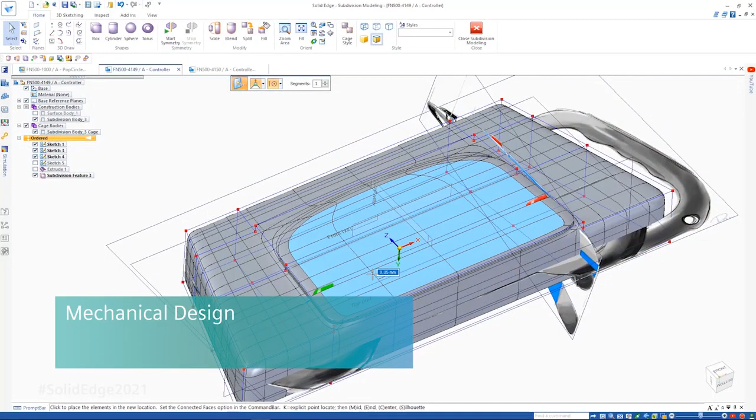Mechanical design. Design at the speed of creative thought with new subdivision modeling, lightning-fast reverse engineering, a new user interface that's powered by artificial intelligence and an intelligent 3D model search engine.

Electrical design. Enable fast, accurate 2D layout of industrial control panels with new cabinet design capabilities.

Simulation. Optimize and validate designs with tighter integration between flow and structural simulation.

Manufacturing. Speed up NC programming with a searchable post-processor database, new fast roughing, and adaptive milling.

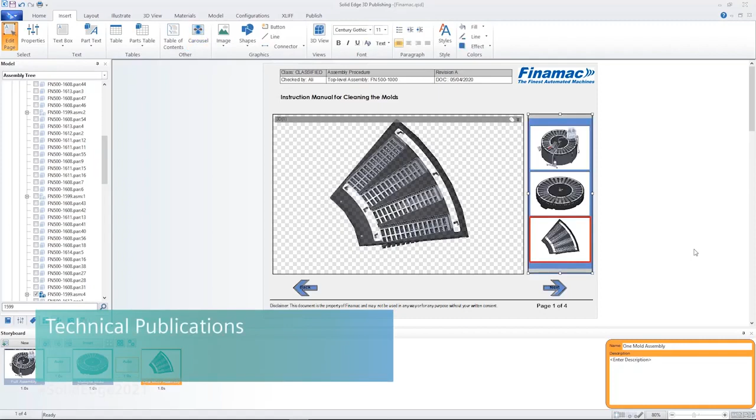Technical publications. Produce high-quality documents and illustrations faster and directly from your 3D models.

Data management. Take control of your data, saving time and money with rapid concept modeling and shape search capabilities.

Cloud-based collaboration. Harness the cloud to edit and share CAD files and much more. And there's so much more. Our beta customers are calling this the best Solid Edge release in years. We can't wait to share all of the details with you, so get ready to experience Solid Edge 2021.

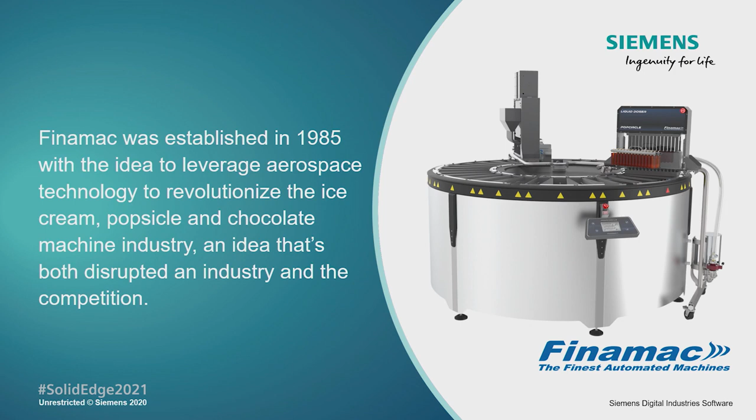I'm going to be using a data set here to talk through a popsicle making machine. And the really interesting part about this, I want to thank our partner Finamac. Finamac's a company that had a great idea. They said, how can we take aerospace technology and apply it to machines like ice cream, popsicle, chocolate making. And they've really transformed their business, full digital transformation.

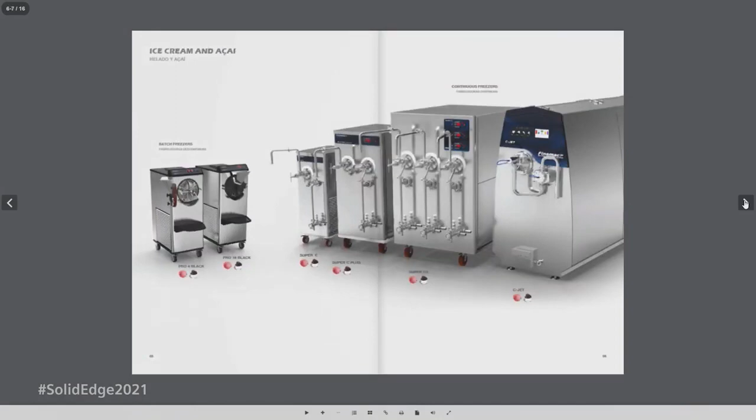If we take a look through their catalog, we can see all sorts of things: ice cream making machines, popsicle making machines, chocolate, display cases, ice pop machines, mixture prep, all beautiful designs. The most amazing thing about this to me, however, is that none of this is real, what you're seeing. This is all digital twins. Every picture you see here is straight from Solid Edge, rendered, and into their catalog. So you're really seeing the full realization of the digital twin here with Finamac.

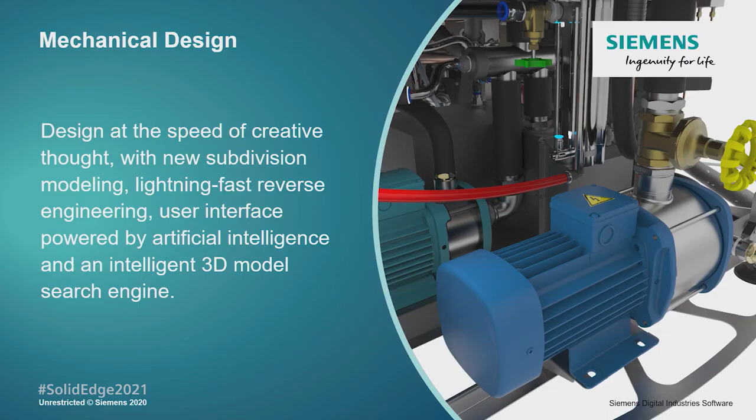So let's start with mechanical design, the core of what you do. New subdivision modeling techniques, very fast reverse engineering, and some new artificial intelligence capability I think you'll really like. Also an intelligent 3D model search engine. Quite a lot to see here just in this first section.

So let's go through them one by one: subdivision modeling, reverse engineering, adaptive UI, core CAD, the stuff you do daily, and supplier catalog integration. And these are just a few of the things that we're highlighting today. There's a ton of new stuff in Solid Edge 2021 that I think you'll really enjoy and will be really productive for your company.

And let's start with subdivision modeling. This is amazing technology that allows anyone to create beautiful shapes. In the past, this was really the domain of a specialist—NURBS and surfacing and all these complicated things. Now anyone can create beautiful shapes.

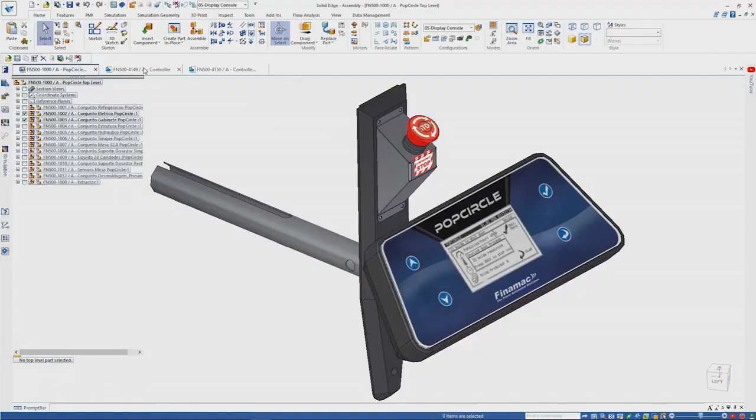Let's take a look at that with Oliver. Yeah, thanks Dan. So let's jump into the Finamac machine and we'll take a look at subdivision modeling. Here what we're going to do is design the portable controller. And as Dan said, subdivision modeling is all about enabling you to develop distinctive organic shaped products, but without the need for expert knowledge. So if you're not the best at surface modeling, for example, here's your chance to shine.

We'll start here with industrial design sketches as a guide, and really subdivision modeling can be simplified to 3 steps: the initial shape, a control cage to push and pull, and then blend options. We started here with a box shape and pushed out the lower portion using the control cage. A split operation can be used to subdivide the control cage, which in turn gives more control over the shape of the body. And the control cage can then be adjusted.

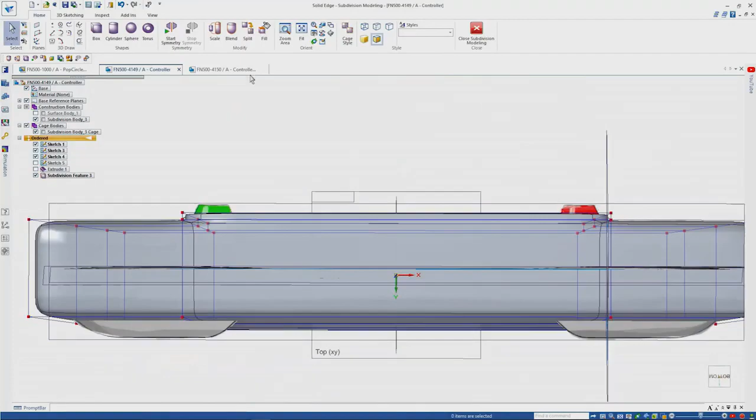Here we can accommodate room for the central area where we need the controller screen. A simple split operation adds the necessary faces to the model. And then importantly, this blend function can be used to control how sharp or smooth certain edges are. And while many expect to see only smooth blend options, that's not the case in Solid Edge.

Here you can choose sharp blends wherever you like. Then to create the cutout for the screen, a series of similar push and pull techniques can be used to easily get the desired result.

Now, many parts are designed symmetrically, especially in the consumer space. To achieve this, we can simply define the symmetry plane, then any edits made on one side of the cage are reflected on the opposite side, as you can see here.

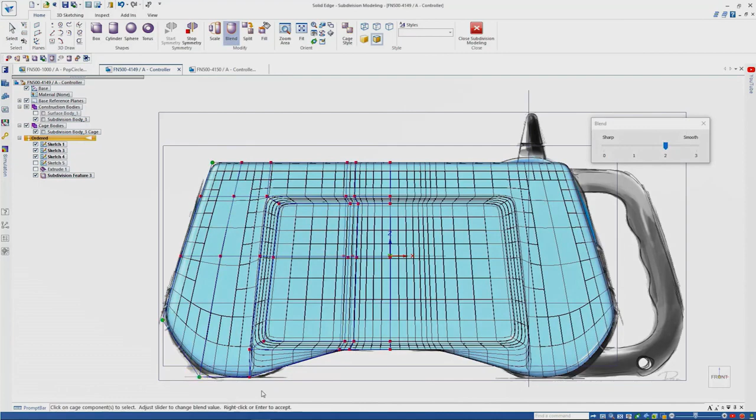And those of you who use synchronous technology in Solid Edge will be familiar with the steering wheel, and it's equally at home here to manipulate this organic shape. For the notch at the top of the part, a simple move face operation creates the geometry that we need here. And to help keep track of what edges we've blended, the value of each of those blends can be shown at any time for every edge and vertex, as shown here.

Now we need to create the handle on the right-hand side of the Finamac controller. I'm not going to cheat here by pulling out something pre-created. We're going to do this live just to see how easy yet powerful this technology is.

Same as before, grab an initial shape. Here we'll extend its form and then use the control cage to push and pull into shape, followed by some blend control, of course, for the finger grips.

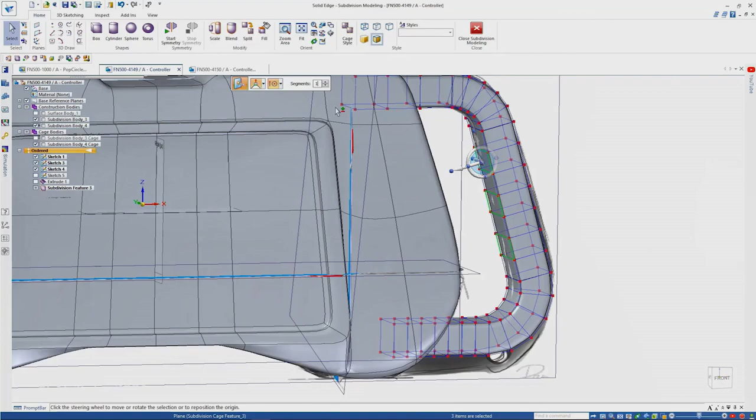Nice and easy. Done. Importantly, traditional solid and surface modeling techniques can be integrated with subdivision modeling. Here we can use an existing surface to split the subdivision geometry and then thicken the result to create the raised portion of the handle.

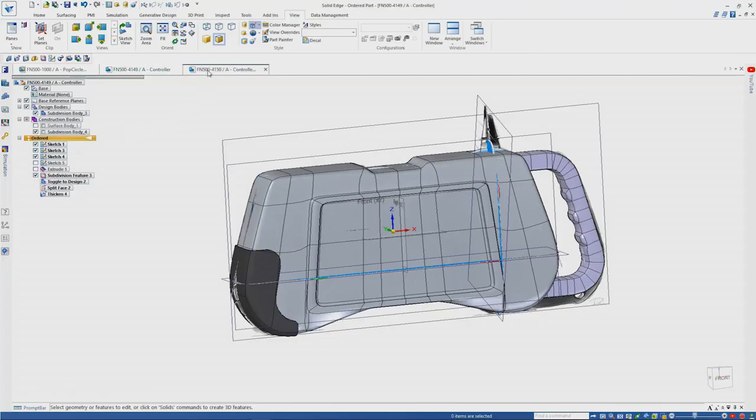And of course you can go on to add further details using more traditional modeling methods. But just look how easy that was. Something that would have taken traditionally hours, if not days. But here in Solid Edge 2021, we're talking minutes.

Back to you, Dan. Yeah, thanks, Ollie. I tell you, I've been around the industry a long time, and I've seen what it takes to do that kind of modeling, literally days to do a type of model like that. And to see that done so quickly live in front of us, it's really, truly amazing, even to an industry veteran like me.

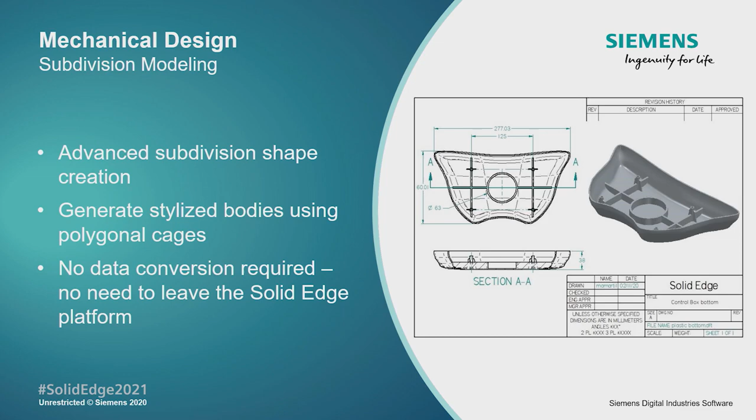So what you see is it's really easy to create those shapes, using the polygonal cage. It takes a little bit to get the hang of it, but once you do, it goes really fast. The great thing is it's right in Solid Edge, built in, no specialized tools or other products to buy. Available to you in Solid Edge 2021.

We're seeing great feedback from customers around this. For example, Jason English at Ditch Witch. Ditch Witch makes earth moving and ditch digging equipment, but they're bringing more and more stylized shapes. They want to see what their industrial designers can do with a new technology like this. I'm excited to see as well.

Next up is reverse engineering. We introduced reverse engineering a couple years ago, and we've been continuing to invest in it, making it faster, adding new features. I think you'll be really pleased with what we have in Solid Edge 2021. Let's take a look.

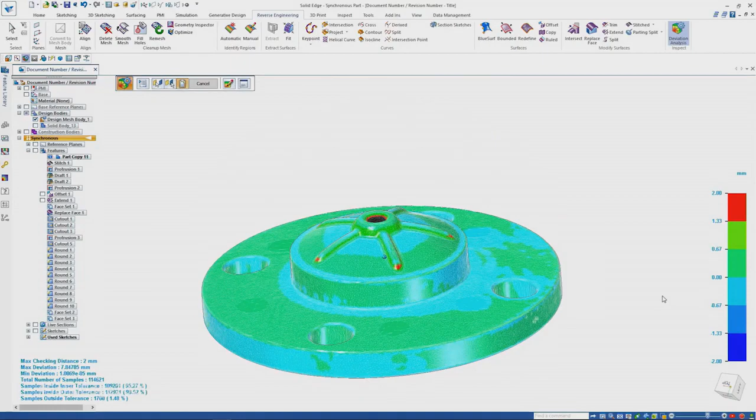Thanks Dan. So we'll jump back into Solid Edge 2021 and take a look at one of the recent additions to Solid Edge's reverse engineering toolset, deviation analysis. This allows you to measure the accuracy between an original scan and the resulting reverse engineered model, or even compare scans. The result plot color codes deviation for easy interpretation.

Red means our test body exceeds the reference body, and dark blue depicts negative distances. On-screen callouts identify minimum and maximum deviation, and you can copy and paste any of the data for later reporting. Settings such as deviation range and result decimal places can be adjusted at any time, taking just seconds for the model to recompute. Back to you, Dan.

Thanks Ollie. Some great new capability there in reverse engineering. Of course, the deviation analysis - those models that you're taking from the real world and creating a physical digital twin, how far do they deviate from the real world product? Easy to tell with deviation analysis. And importantly, it's really fast now, so things that used to take minutes now take seconds.

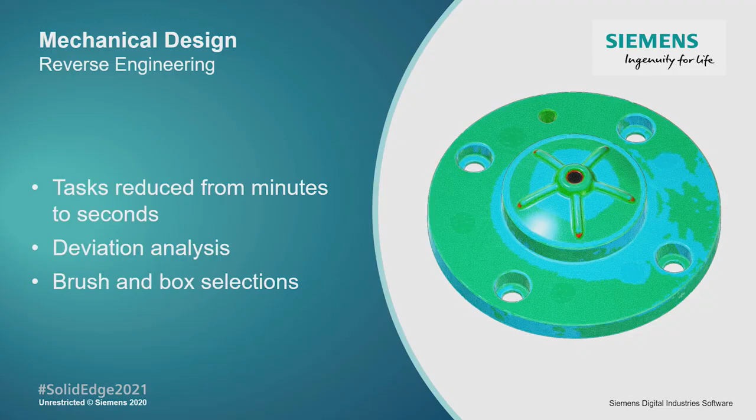Next up is Adaptive UI. This is a great new technology I'm really excited to bring to you guys. It uses artificial intelligence to predict what you'll do next. How does it do that? Well, it looks at what you've been doing in the past, looks at your patterns, and then figures out what you might do next and presents those options to you. It's really groundbreaking stuff, so let's take a look.

Very cool indeed. So let's jump into Solid Edge once more. What you need to do here is keep your eyes on the top left of the screen. Solid Edge 2021 includes an artificial intelligence-based assistant in the user interface up here to predict the next commands you need based on what it is you're doing and where you are in a design.

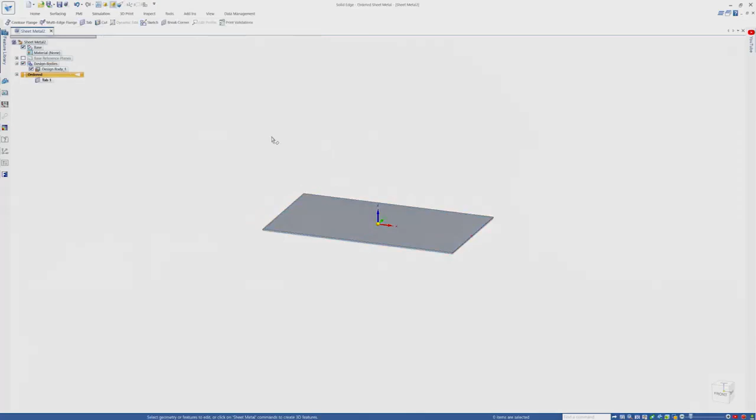So for the Finamac machine, there's lots of sheet metal work, and Solid Edge 2021 has learnt that from the design engineer. Rather than presenting tools that are commonly used across the industry, which would be good, it's presenting tools commonly used to the individual, which is excellent.

That's right, Solid Edge 2021 is now individually tailored to you, and what's more, it will continue to learn from you and dynamically improve how it holds your hand through your day-to-day work. It's really interesting to watch, dynamically presenting the next selection of tools, even across environments, as we go from sheet metal to sketch and back, presenting those specific commands.

And I said at the start to keep your eyes at the top left of the screen. Notice that it's just one toolbar. This means you can remove the other toolbars to maximize your workspace. You have what you need right here, ready when you are. Back to you, Dan. All right, thanks, Ollie. That was great.

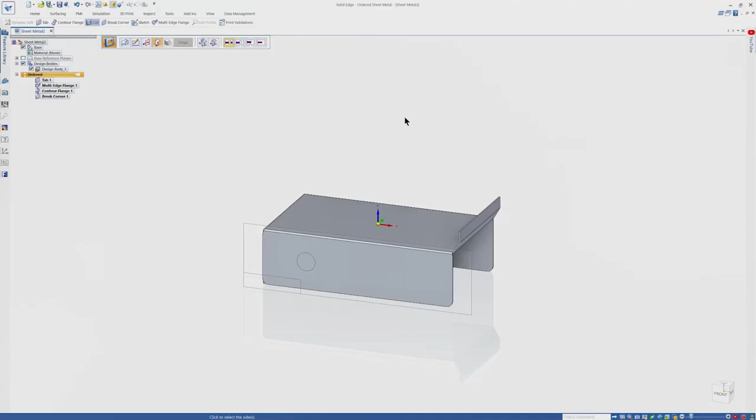As you saw, we're harnessing the power of artificial intelligence, and you see how it can really be applied to your daily work. So it's personalized to you, it actually learns from you. What it does after the first day of usage versus what it does after a week of usage will be a little different because it's learned from you. It's a little bit smarter.

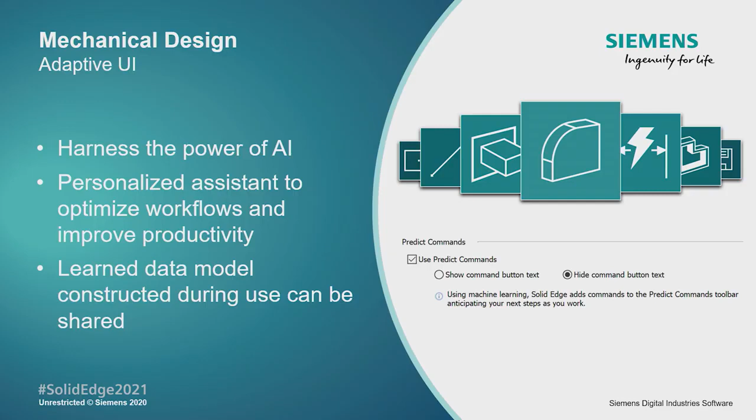And the great thing about it is, though, you can also share that with others in your company. So even though your work isn't the same as other companies, within your work you may have similar things that people do. You can give them a head start on learning by sharing your piece with them.

In the area of core CAD enhancements, we've had a lot of work going on. As I said earlier, there's no way we can cover the depth and breadth of Solid Edge 2021 in this short update. But I want to show you a few things that I think will be really valuable in day-to-day work, the stuff you do every day.

Great, thanks Dan. So yeah, let's jump back into Solid Edge one more time. And here is the Finamac Popsicle machine. Oh, by the way, the actual name of this machine is PopCircle. PopCircle for popsicles, I like it.

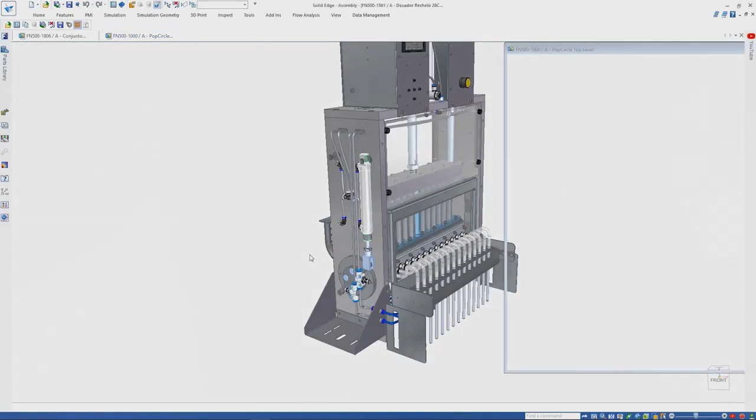First off, we're using large assembly mode here to make the most of our computer's resources and keep things performing as we expect. You can see that top left. And there's more to help with performance here also. It's common practice for suppliers to provide a 3D file of purchased items, such as the piston assembly that you can see, and using the new internal components option on import, all separate parts are contained within one single assembly file, with no parts written to disk. This enables faster import times, especially on larger data sets.

And even though these parts are all internal, we can still carry out many traditional operations, such as taking measurements, analysing mechanisms. Here we can see the correct operation of the piston assembly with its internal components. Furthermore, you can then assemble the item in a way it would work if it were a regular assembly. All in all, this provides increased performance and lower consumption of system memory.

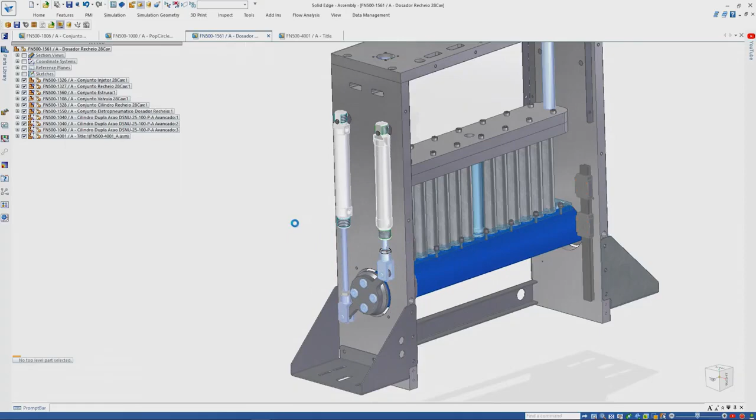Next up, reusing designs is now even easier. When copying and pasting multiple parts and assemblies between designs, existing relationships are automatically captured and reused in the target assembly. A step-by-step process guides you through the operations to add the external relationships required to fully position the parts. All internal relationships come along for the ride. This significantly reduces the time for these common operations.

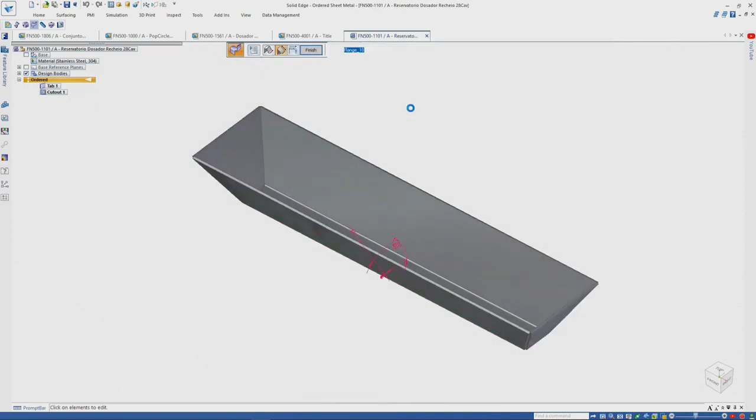Next up, let's step into sheet metal, where we've got new multi-edge flange command that speeds the process for designing sheet metal parts. Multiple edges can be selected at the same time, angles can be defined, and miters automatically added. It's as simple as picking the edges and then pushing or pulling. In addition, partial or centered flanges can be defined, and trim options make light work of tasks that would normally require multiple operations, even with offset or gap distances as required. These sheet metal enhancements, along with many others, increase productivity and efficiency by being able to design parts faster and easier.

Next up, and also new in Solid Edge 2021, is a new Decal Command. This makes it quick and easy to add labels and images to parts. You simply select the desired image, define the desired size, and then position it accurately using regular sketch relationships and dimensions. The decal can span multiple faces, as we see here. However, changing the position of it is as simple as modifying the dimensions or relationships that are assigned.

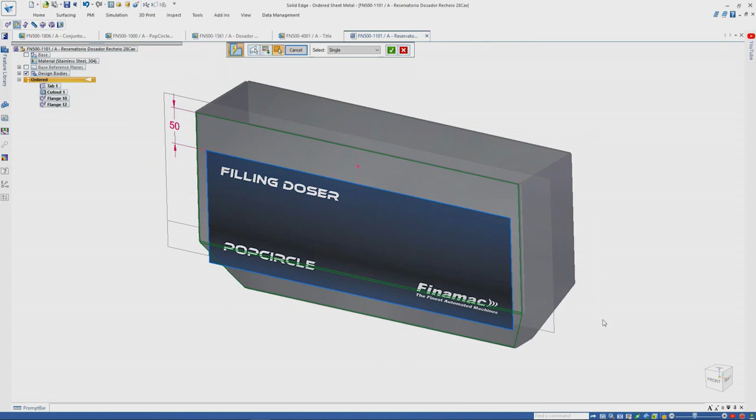Solid Edge 2021 also sees enhancements in frame design. We'll move to that next.

Here, what we're going to do is place a cross frame which has coping applied so that it matches the circular cross-section of the vertical frame. Now we can specify a weld gap between two frames, and this is especially important in generating an accurate cut length of welded frames in our parts list.

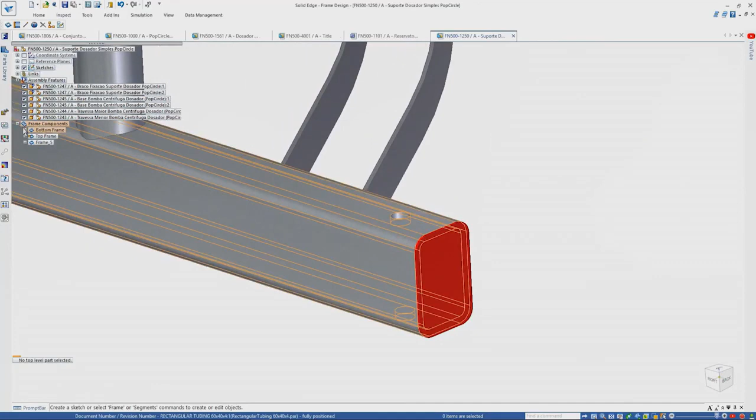Also new in Solid Edge 2021 is the end caps command, which allows quick definition of these types of parts within a frame. This single command provides a wide range of options. Simply select the frame cross-section, choose the material and specify the type. You can choose from different types like inward or outward, and even define offsets or have chamfered corners. The end caps are then reflected in the bill of materials, eliminating additional work for the user.

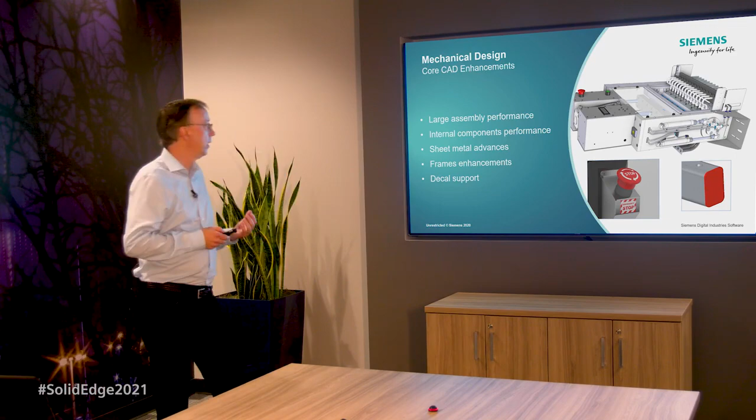Today it's used for importing parts, as Ollie was talking about, the ability to import an engine that has 300 parts and just jam it all into one assembly without worrying about all those individual part files, because honestly you really don't care about them. Perhaps they come from a supplier. But that internal components technology will also let us leverage it in the future and do more exciting things in coming releases.

The sheet metal advances are really amazing. I know a lot of you are Solid Edge customers because of sheet metal. We're the sheet metal guys and continue to be so. The new multi-flange with the ability to auto-trim against each other is unique in the industry, and it's actually patent pending right now.

Frames, we continue to build that out. A lot of machinery design customers build frames, end caps, and the weld gaps provide great capability there. And decals, as you saw, it's not just decals on a flat surface, it's curved surfaces, across multiple surfaces. Really, really nice implementation.

We see our customers really enjoying the Solid Edge 2021 release. For example, Luca Carminati at CMS has been working with the new sheet metal. They do a lot of sheet metal at CMS, and this multi-flange and auto-trimming is going to save them a bunch of time.

And what about supplier catalogs? You're often getting different parts and catalog data from your suppliers. Different people make different products that you incorporate into your product. What if it was easy to find, with a bunch of different ways to find it and be able to utilize it in your design? It's going to save you a whole bunch of time.

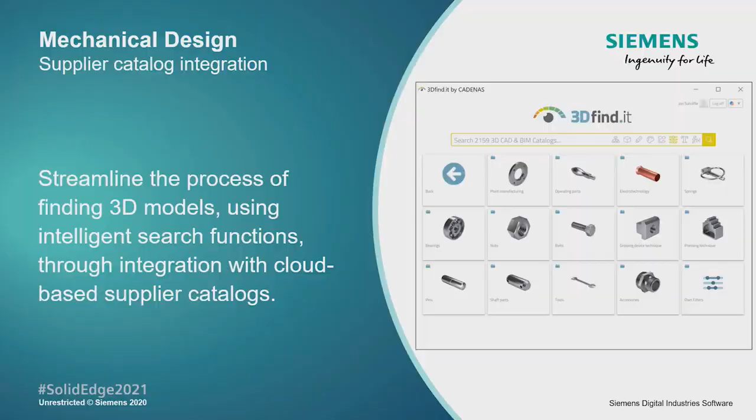Let's take a look. This is 3D Find It for Solid Edge, powered by Cadenas, the latest search engine for mechanical, electrical, and electronic engineering. Here we are searching for a cable gland using text, narrowing down the search by filtering supplier, and we can even add additional search items, in this case to filter for ISO standard.

You can even search using 3D geometry, sketches, and much more. We can visualize the 3D model for the part, or even its 2D drawing, select the relevant individual parameters as you saw earlier, and then a single click brings it right into Solid Edge, ready to go. Back to you, Dan.

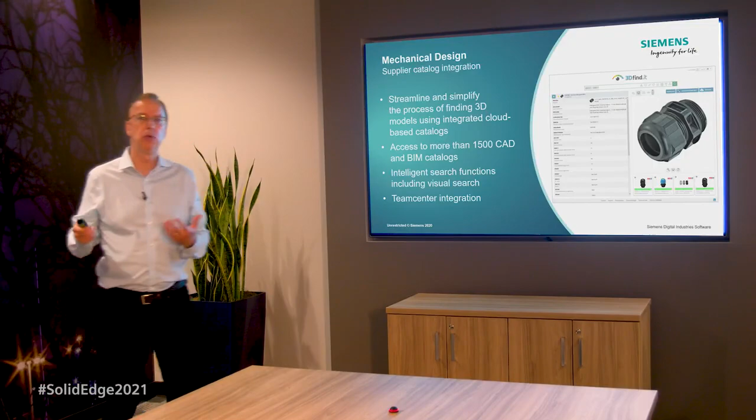Thanks. So as you see, you can really save a lot of time, just reusing things that already exist, but the problem is usually finding them. Being able to go to a supplier catalog, find the suppliers you're used to working with, and get the products directly from them. Access to more than 1,500 CAD and BIM catalogs, and lots of interesting ways to search, fully integrated with Teamcenter as well.

The folks at Ditch Witch are very excited about this. The catalog integration allows them to save a lot of time, not having to build parts or rework parts, but simply use what already exists.

All right, so a lot of stuff there in mechanical design, more than we could possibly cover here. I invite you to look into it more deeply. But not just mechanical design. We were talking earlier about digital twin. I think you really need to take a look at your business and think not only how can I be productive with mechanical, but can I expand? Can I go further in my production process perhaps? Or can I go sideways into electrical? What ways can I become more productive as a company by using the tools to enable your digital transformation?

So there's a lot to talk about in electrical, and first is wiring design. There's a really important thing coming here in Solid Edge 2021, and that's cabinet and panel design. It's a whole different thing when you're wiring a tractor or a car than it is when you're creating industrial control panels and cabinets that go into the machines that you design. Full complement of tools there now. Okay, let's take a look.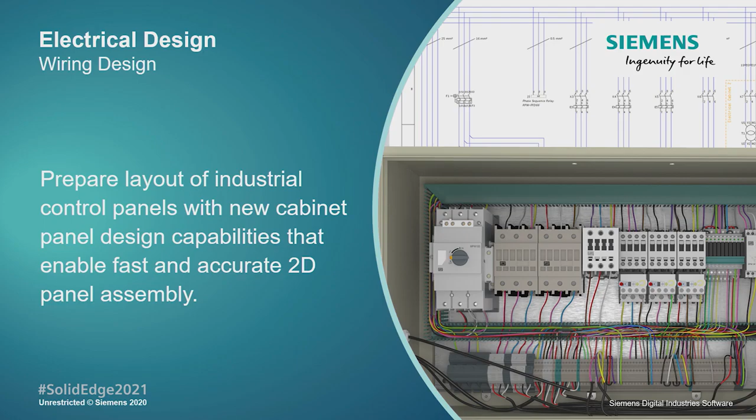So here we are in Solid Edge wiring and harness design. We're going to add to the existing electrical design work for the Finamac machine by laying out the machine's control panel. Solid Edge 2021 has new cabinet panel capabilities that allow us to reuse the schematic intelligence that you know of Solid Edge to generate the panel layout.

Placing the correctly sized cabinet based on our specs, we can add additional items such as backplates, channels, mounts and other hardware. We also need some wiring ducts, so here we'll place a series of channels. Dynamic dimensions provide accurate feedback, and industry standard profiles are available.

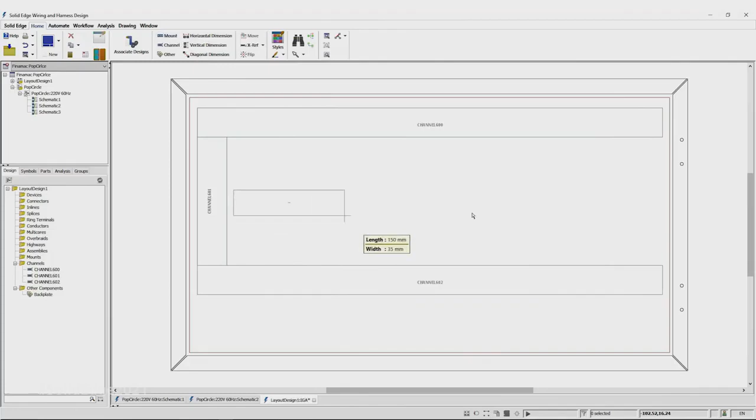Using the mount command, we can add the necessary DIN rails to which we'll attach electrical components. Again, accessing the properties allows us to choose from industry standard sizes and profiles. Adding some dimensions to the mounting plate, as well as the channels and rails, will help document their positions.

Associating the new layout design to the schematic allows us to place the relevant logical electrical components. Placing devices is simple, and there are many ways in which this can be achieved. We can place single objects or multiple objects at the same time. Shortcut options allow control over snap points, rotation angle, the order of placement, and much more, all of which are dynamically previewed during this placement process.

The last few devices are being placed onto the top and bottom rails. Nice and quick and easy. And of course, what's going on in the background and what's automatically being updated is a bill of materials as we've been adding these devices to the layout design. And the bill of material IDs can then be easily generated with balloons.

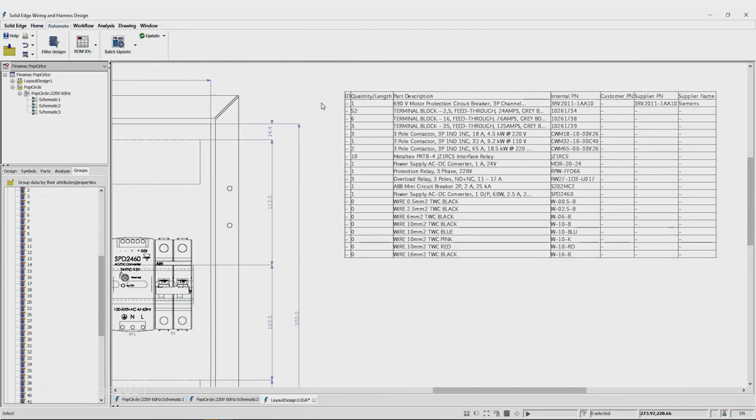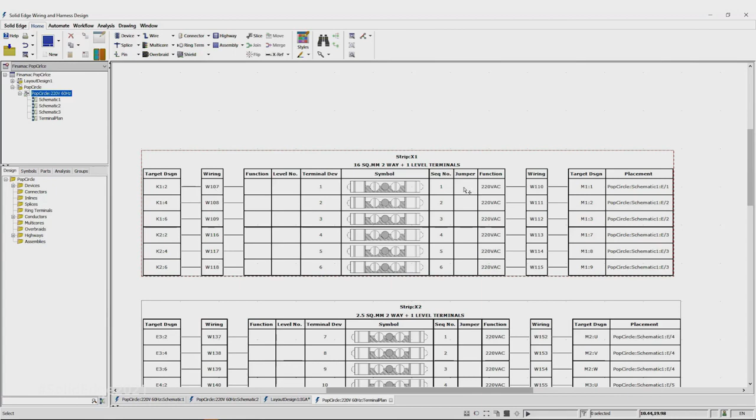Finally, for the panel is the terminal plan, which assists in the assembly and wiring of the terminal strips. The fully associative terminal plan tables are automatically generated, documenting the terminal blocks along with their specific symbol, physical sequence in the strip, and details of where the wires terminate at both ends of each block.

Now that the electrical design and documentation is complete, we wish to share this information with our MCAD colleagues. And this is where connected mode comes in. It makes it really easy for the ECAD and MCAD worlds to come together and collaborate.

So here we're switching to Solid Edge 3D CAD. We have connected mode on, and you can see the existing wiring details that have already been added to the design. We can then cross-highlight components between the two disciplines.

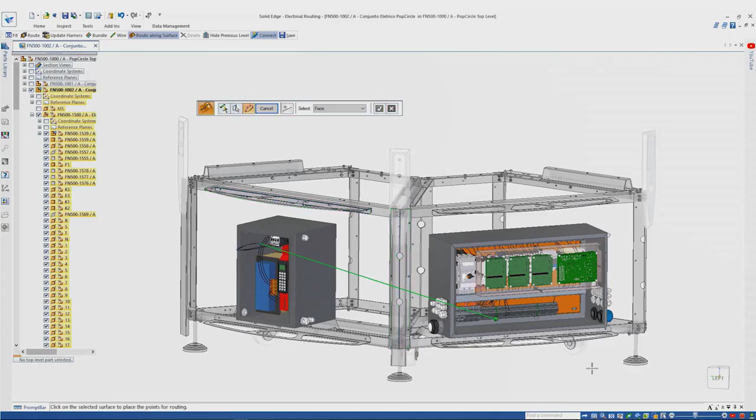Now we're going to bridge in some final conductors to connect the two cabinets together. And then we can bundle these wires together. And to keep the bundle neatly organised within the assembly, we're going to use the new route along a surface command, which provides a highly efficient way of routing the bundle path around the contours of this frame.

All we need to do is simply pick the bundle to be routed, select the faces of the geometry the bundle needs to follow, and then plot some points to define the path of this bundle to route the ends of the bundle through each of the glands on the respective cabinets. Awesome, done.

All right, thanks, Ollie. I will tell you, I am not an electrical engineer. I don't do electrical, but just watching that to me is quite amazing. The amount of productivity you have in terms of laying out the cabinets and panels, really remarkable. So if you're doing something that's using more manual techniques, you're going to find this is going to just add amazing productivity to your day.

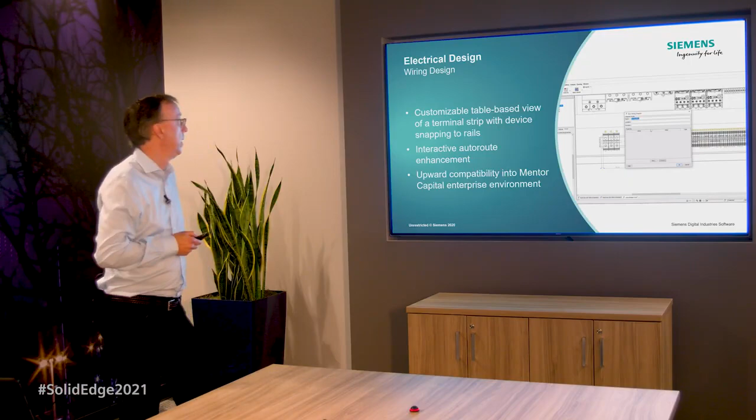And what you saw there, first of all, is that customizable, table-based interface to do the device snapping to rails and so on. There's also, we didn't get a chance to look at it, but there's also an auto routing capability on your schematics that'll save you a lot of time. And of course, this is now all upward compatible to the Mentor line of products.

You got to see a little brief there of routing along irregular geometry. It can be even a sculpted shape, maybe something you did in subdivision surfaces. We also have that connected mode now extended, so it's not only working with Solid Edge electrical, but it's also working with Capital. And finally, we have integration to more third-party products as well.

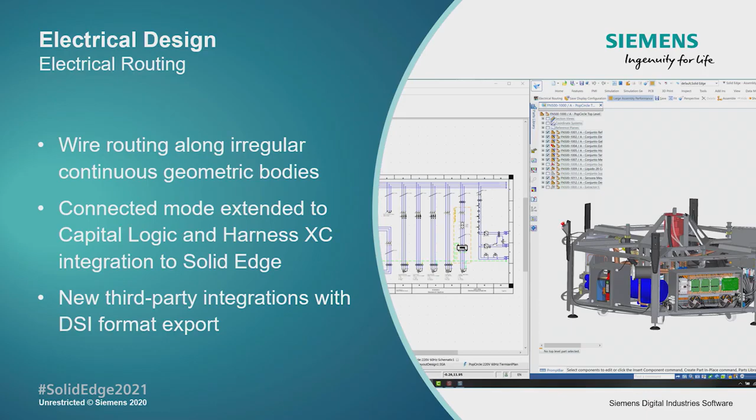In the area of harness design, to be clear, I'm not talking about the 3D that mechanical engineers might think of. Harness design is also something you do in 2D—how are you going to lay out the harness for production? You have the ability to visualize that in Teamcenter as well as tie it back to requirements. It enables tracing to the requirements themselves, and it allows interactive auto routing for the full signal path.

In the area of PCB, some great stuff as well. It's all about that collaboration between electro and mechanical and the ability to bring those things back and forth, maybe propose a design change and accept or reject it. That's all supported through the IDX 2.7 format, as well as we have the mapping of 3D models between the Xpedition product, for example, from Mentor and the Solid Edge product.

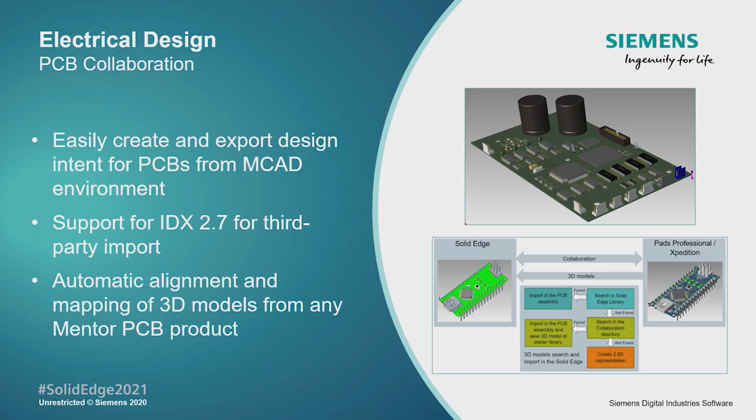We're seeing a lot of traction here with people who are adopting this product. From our portfolio, Solid Edge is more than mechanical—mechanical and electrical with the wiring, the harness, and so on, and you see how they work together. Folks like Matthew Fresco at WashTech are taking advantage of this already. It's a true digital twin—not just a CAD, mechanical CAD digital twin, but a digital twin including electrical, and it really solves a bunch of problems that are normally found in the field. I think you're going to find this is a great area for you to expand into.

Next up is simulation—lots going on there. Of course, we have products for stress analysis, modes and vibrations, all sorts of different things, flow analysis. You're going to see some great integration between those two products happening in Solid Edge 2021. Let's take a look, Ollie?

Yeah, let's jump back into Solid Edge and we'll take a look, back into the PopCircle machine. First off, we're going to look at Simcenter FLOEFD for Solid Edge, which features new capabilities and modules for electronics cooling applications. The new package creator specializes in the rapid creation of accurate thermal models of electronic packages with correct definition of chip layers and solder balls on the chips.

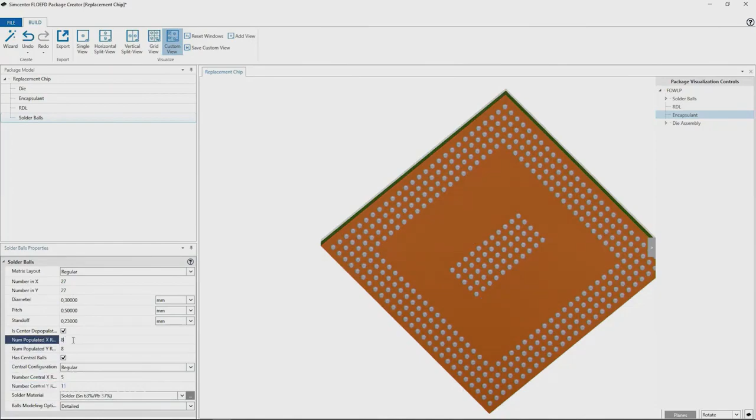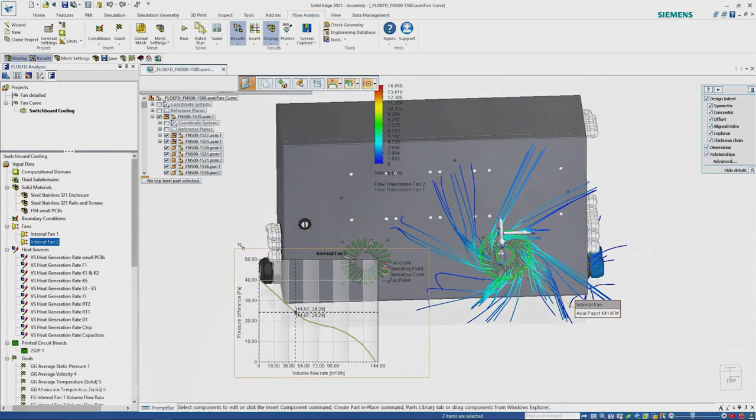Here we're going to see clearly the thermal effect on this PCB board and then in turn its effect on the overall electronic enclosure. Looking at the flow trajectories, which we can turn on, around the fan area, this shows how the fan swirls the air and pushes it into the side of the enclosure to cool it. We can also see how the fan is performing on the fan curve and show the operating point of the individual fans based on the fan curve data from the fan manufacturer. ISO surfaces are another way of illustrating where airflow is going and showing the velocity as a volume plot.

In addition, Solid Edge 2021 now has the ability to apply the results from a computational fluid dynamics study, which we've just seen, as an input to Solid Edge's structural or thermal simulation studies. Focusing on the tank containing the liquid bath that freezes the popsicles and looking at the results of this thermal flow study, we can see how the cooling liquid interacts with the assembly. These results can then be sent to Solid Edge's structural simulation by using the export results command.

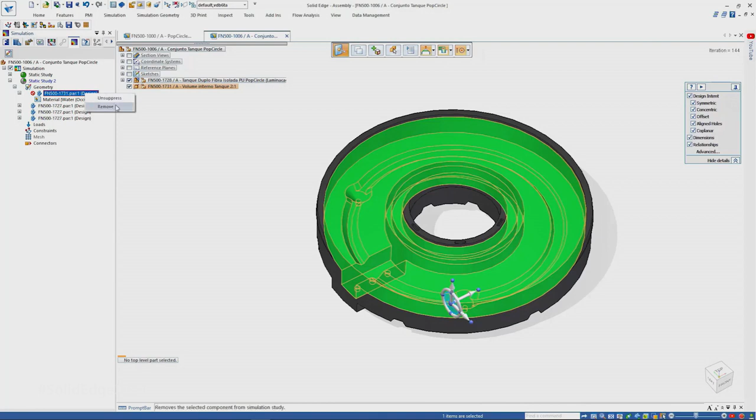Now let's get the structural analysis set up. Also new for Solid Edge 2021 is the ability to suppress or remove any components directly from the simulation pathfinder, making it easy to test the design on a subset of the study geometry. When defining the material for the insulating core, another new feature is the ability to highlight key material properties that are required for the study we're attempting to solve, as can be seen here by the green colour coding. This makes it easy to ensure we have appropriate properties defined for an accurate study.

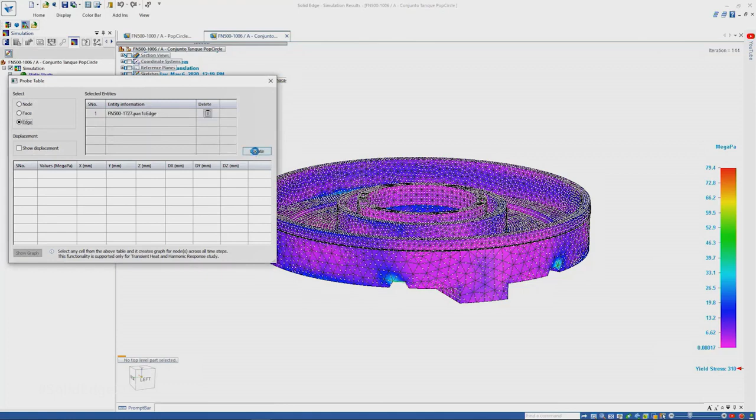Our last step before solving our structural study is to import FLOEFD pressure or thermal results. These are automatically applied directly to the correct bodies and also the faces in the study. And the result: we can see all the pressure from the cooling liquid and where it's causing the highest areas of stress on our design. It doesn't stop there for new capabilities in Solid Edge 2021—also new is the ability to probe edges, ultimately saving us time from having to select each individual node.

Cool, back to you, Dan. Thanks, all. Like I say, I've been in this industry a long time, and I'm still amazed by some things I see. The stuff around flow simulation, the integration of that with the stress simulation—it's just amazing stuff.

So we continue to enhance Solid Edge simulation in many ways, improving the interaction with materials, making it easier to remove components from the study, and being able to probe the geometry more easily. But really that ability to tie flow and structural together is really quite amazing.

We're able to take the information from flow and read that directly into Solid Edge for a stress analysis. In addition to that, you saw the new Electronics Cooling Center, a full suite of capability for electronics cooling, very deep. The other thing we've added is something called BCI-ROM, which means probably nothing to you.

But what it should mean to you is months to minutes. This is amazing technology. A study that literally would have taken 6 weeks of CPU time can be done in 3 minutes, and in those 3 minutes you'll be within 5% of what those 6 weeks would have given you. Truly amazing stuff coming out of the team, and I invite you to take a look at it.

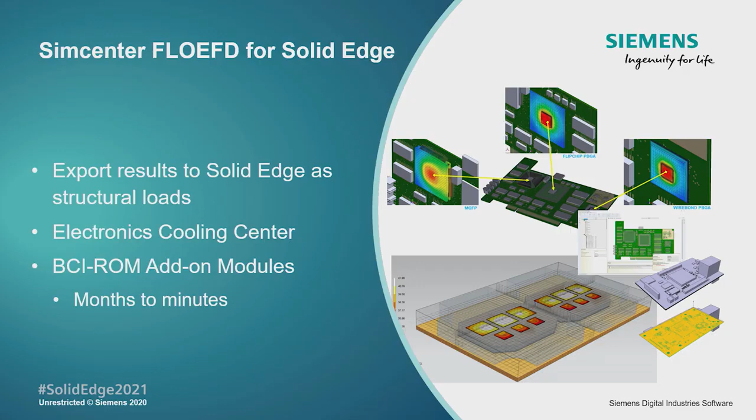Next up is manufacturing. Accelerating your product development, whether it's additive manufacturing or subtractive manufacturing, we have the tools for you.

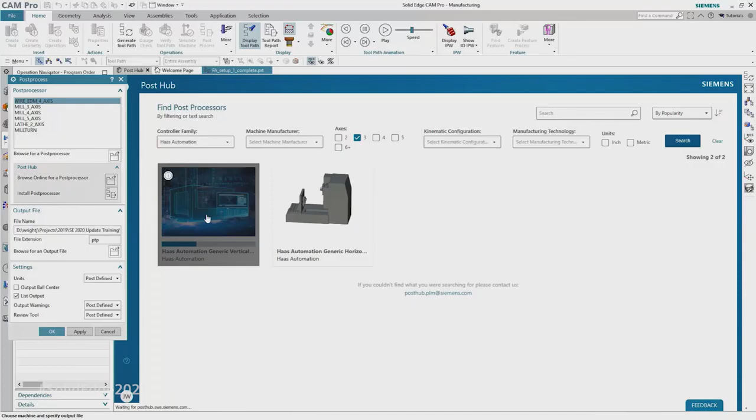Let's jump into Solid Edge CAM Pro. New in 2021 is integration with PostHub, an online library of post-processors that makes integration with your machinery easy and quick. With new posts added regularly, PostHub is searchable with filters for machine type, manufacturer, controller type, and kinematic configuration. Once the desired post processor has been selected, it can be automatically downloaded and installed, and verifying the post output is nice and simple.

Next up, we're going to take a look at Solid Edge CAM Pro's multi-axis roughing, which is a great tool for quickly removing stock from aerospace parts like the one shown here. Multi-axis roughing uses adaptive roughing technology to machine parts in the most efficient manner.

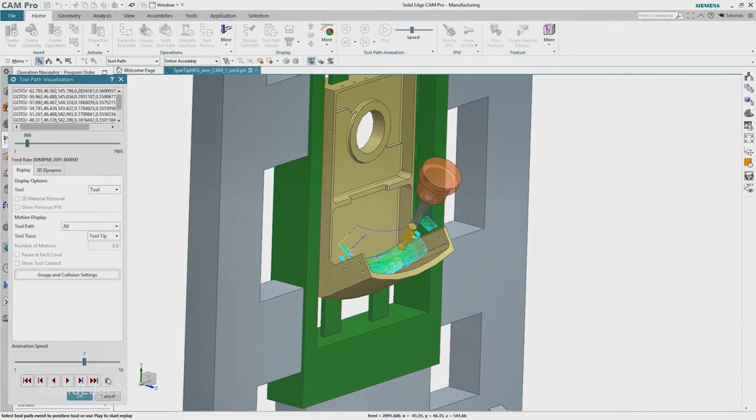Viewing the multi-axis roughing path in replay mode allows visualization of the tool axis tilting as the cutting tool removes the material. The 3D dynamic simulation option shows tool motion and concurrent material removal. Notice how multi-axis roughing efficiently removes material without ever burying the tool in the cut, which is extremely important for efficient machining.

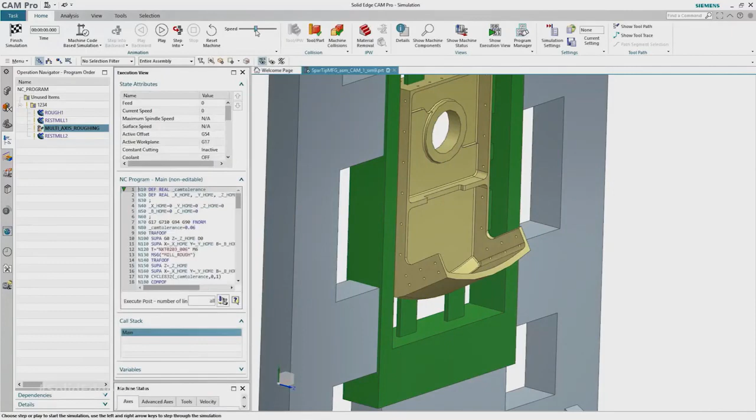With machining simulation, users can view the actual machine motion, which delivers a really high confidence level and is necessary for complicated multi-axis machining centers. That's what you see here. Solid Edge CAM Pro supports G-code based simulation, meaning the virtual machining center is acting upon the G-code just like the real machine will.

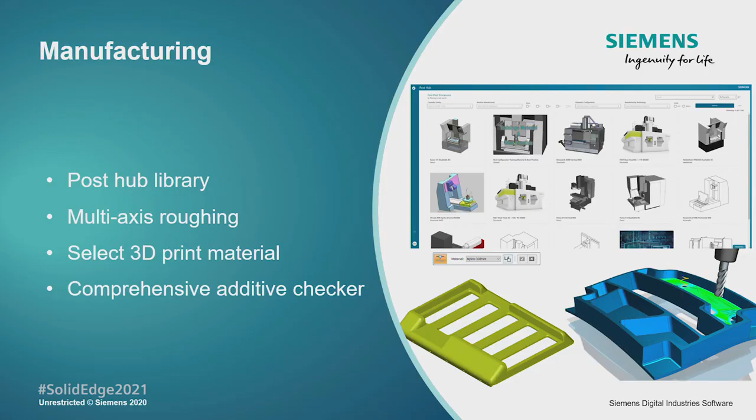We've also added some things in additive we didn't get a chance to look at, but better material selection for what you're going to print your part with, and bringing together various additive checkers into one comprehensive additive checker that just makes it a whole lot easier to interact with.

Another part of manufacturing, though, is nesting, right? A lot of you do sheet metal. We talked about sheet metal earlier, and in fact, the ability to lay those sheet metal parts out in the most efficient way possible. We have the most efficient algorithm in the industry for doing that. I want to talk to you about some of the new enhancements in that area. So let's take a look, Al.

Yeah, thanks, Dan. Let's jump back into Solid Edge. And if your machine looks like this, as in consisting largely of sheet metal parts of varying materials and thicknesses, you'll really benefit here.

Jumping into Solid Edge 2D nesting, you can now search the complete assembly for appropriate sheet metal documents, and it'll automatically sort the parts by material type and thickness as this progresses in. By selecting the material type and then thickness, you can quickly make patterns from multiple jobs, enhancing shop floor efficiency. Flat patterns are then automatically extracted from the parts, saving valuable time here.

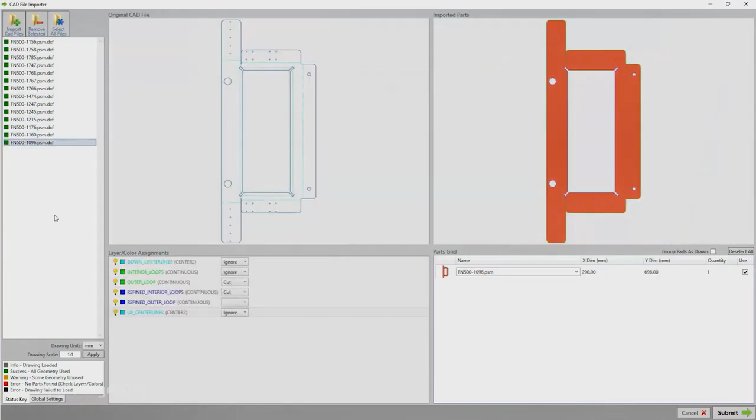And assembly occurrence counts now automatically define part quantities, while the job multiplier quickly calculates the amounts needed to manufacture multiple machines. Solid Edge 2D nesting supports multiple sheet sizes.

Standard sheet sizes are stored in a library, and you can easily define your own custom sizes. Here's Solid Edge 2D nesting doing its thing, finding the most efficient use of material. Savings in material costs alone, gained by the highly efficient algorithm, as Dan mentioned, can quickly offset the software investment.

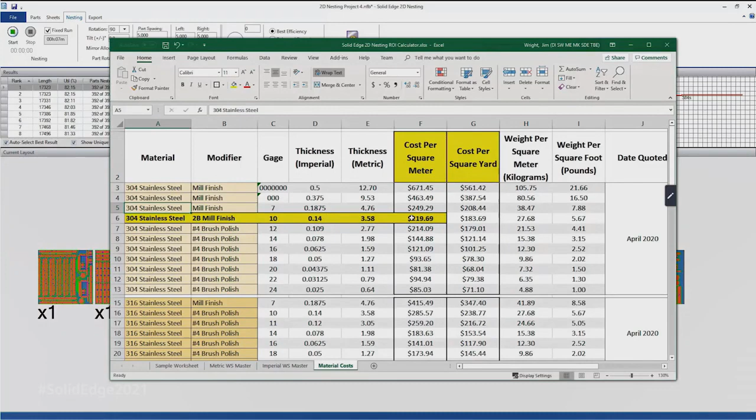Last but not least, 2D nesting has a new quick cost estimator. From user-defined costs per square metre or yard, 2D nesting quickly generates the accurate cost of material needed for job cost accounting, quoting and inventory purposes. We can see that applied here in the software, automatically giving ourselves that estimated material cost. Really nice.

Back to you, Dan. All right, thanks Al. So 2D nesting, I think, is a great opportunity for many of you doing sheet metal to save a lot of money, honestly. It's a very efficient algorithm, the most efficient algorithm in the industry.

We've also enhanced it to deal with odd-shaped sheets, like you see in the upper right here. The ability to nest something out of cloth or leather, things that have an odd boundary, are now supported. Adding the cost of material, the job multiplier, just makes it a lot easier for you to get your job done, sorting by material or thickness. Some really great new stuff in Solid Edge 2D nesting, and I suggest you check it out.

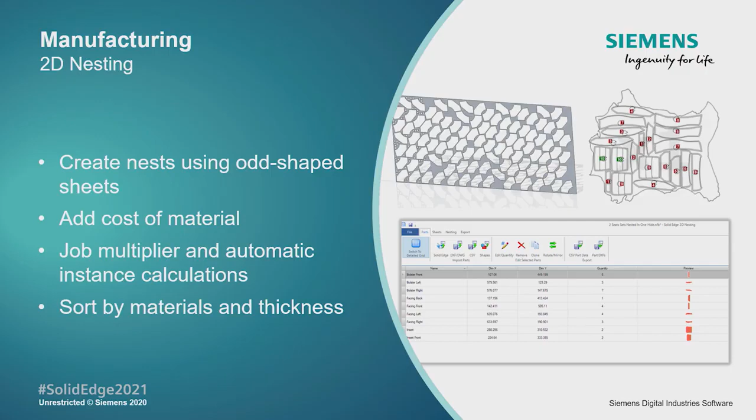Next up is tech pubs. Over the years, you've generated tons of Solid Edge data. What if you could take advantage of that and be able to generate beautiful technical publications super easily? Well, it's faster than ever in Solid Edge 2021.

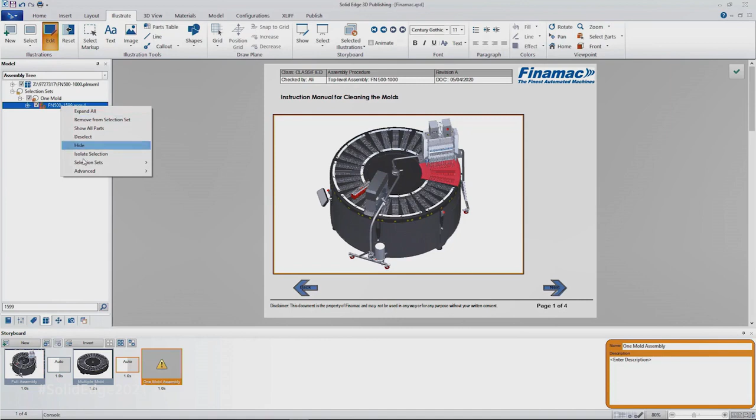Thanks, Dan. So yeah, let's jump back in one more time. Here we're going to put together an interactive maintenance publication, something that can be used on a touchscreen tablet by the maintenance department. A host of new and improved functionalities make it simple to create clear technical publications, be it for manufacturing, installation, or here, maintenance, and it can be interactive content like this, or hard copy paper content too.

New selection capabilities in Solid Edge technical publications allow the organisation of groups of parts and subassemblies into named sets, making it easier and faster to select, show or hide multiple parts at the same time. Here we'll focus on this single mould assembly to build a document that describes the cleaning process.

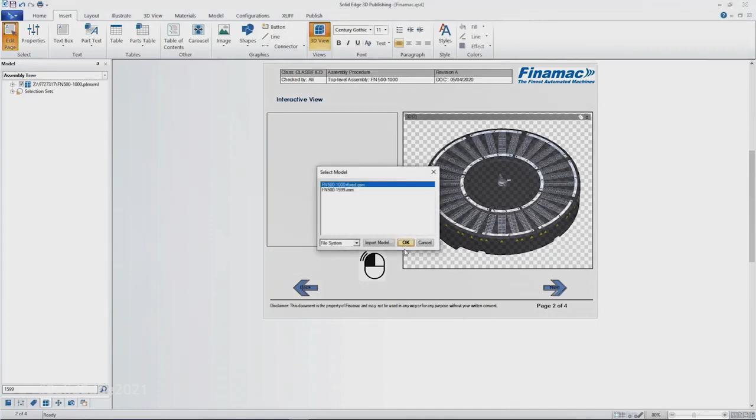The new View Carousel function makes it easy to navigate through illustrations within a storyboard, and creating an interactive view is fast and easy. Here we can accommodate multiple 3D views on a single page, and selecting a part on the right displays it in the view on the left.

The next page includes step-by-step instructions for cleaning the mould assembly. The best way to visualise this process is to mimic it through an exploded view with dynamic text boxes providing instructions. Adding buttons to step through the process is made quick and easy by using the new manual markup resizing options. Not only can you import all native Solid Edge exploded views, but you can also create custom exploded views within Solid Edge technical publications.

Adding an interactive parts list is as simple as drag and drop. The parts table is automatically displayed based on the 3D model's metadata. A new powerful and versatile parts list editor also makes it easy to customize this table. Adding an illustration table allows us to quickly switch between the collapsed and exploded views of the mold assembly. You can see that here.

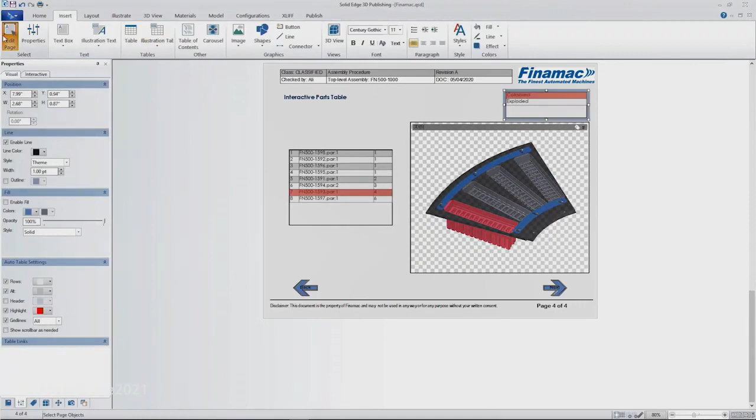The project can be published to industry standard formats such as 3D PDF or, in this case, HTML5. The rich interactive documentation can be viewed in any web browser without additional plugins. Also new, 360-degree publishing to get an all-round view of your product. The automated functionality allows for more robust presentation of your designs, a great way to capture images for product and stakeholder meetings.

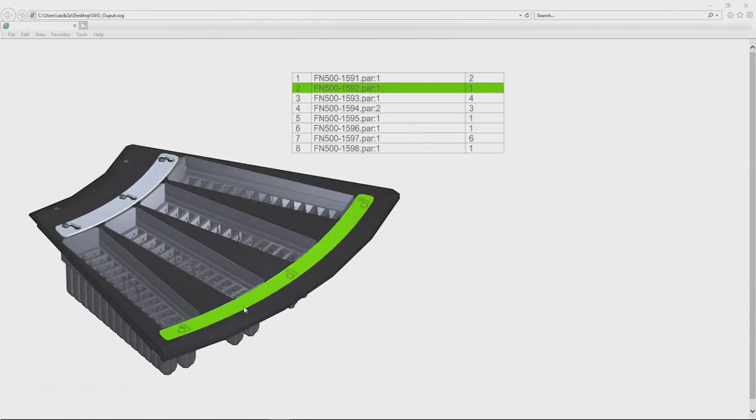Also new, clickable SVGs, another new feature, which allows us to publish an illustration in this interactive SVG format. When a part in the model is selected, the corresponding row in the table will also be highlighted, and vice versa. And furthermore, being SVG, it's beautifully crisp and clear. Back to you, Dan.

Thanks all, looks really good. So the tech pubs, we see that you can take advantage of the data you have today, right? As I said, people have generated literally millions of parts. Some customers have upwards of 15 million parts. The ability to use that in your technical publications directly, very valuable.

Faster performance, now integrated with Teamcenter as well. And you saw some of the great new features, the Carousel page object, the 360-degree publish. All good new stuff in Solid Edge 2021.

That leads us to data management. As I say, you've generated a lot of data. Whether you're a company with 2 seats or 200 seats, we have you fully covered with our scalable system. Let's take a look at some of those enhancements now.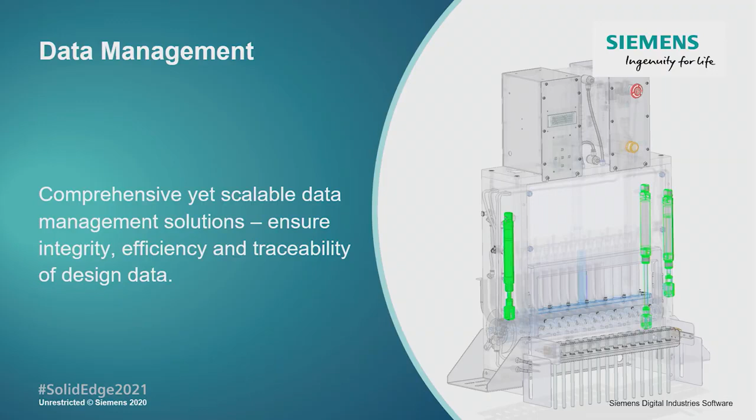Thanks Dan, let's jump back into Solid Edge. We'll kick off with the new concept modeling workflow using this popsicle mold. The concept workspace is a space where a designer can explore new ideas without committing the files to Teamcenter. Think of it as a sandbox where you have the freedom to make any changes to a design without compromising the existing models. Here we're going to create 2 concepts of our design.

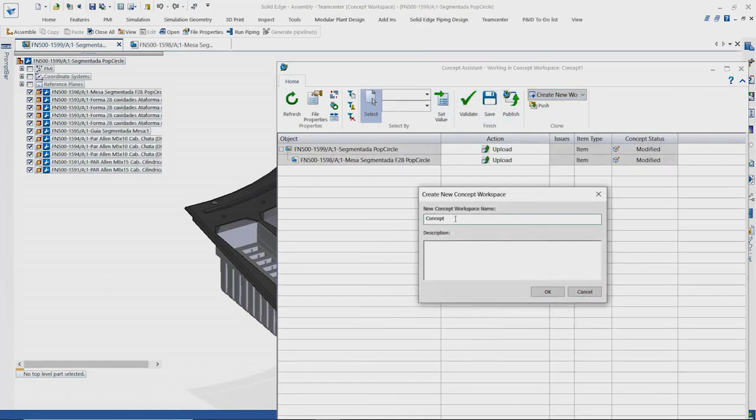We can then explore our first concept for a new mold retaining mechanism by removing some of the existing components, then making some changes to the mold plate, deleting features, as well as adding some new ones. Using this first concept as a starting point, we can go ahead and create another one which can be explored later. The designer has the freedom to create as many concepts as desired. With concept 1 still the focus, we can add the appropriate mold retaining components to finish the first assembly concept.

Going back to the concept assistant, we can switch to concept 2 and open the design data. Here what we're going to do is assemble the different mold retaining components for this idea. Once the concepts are finalised, the data can then be sent to Teamcenter.

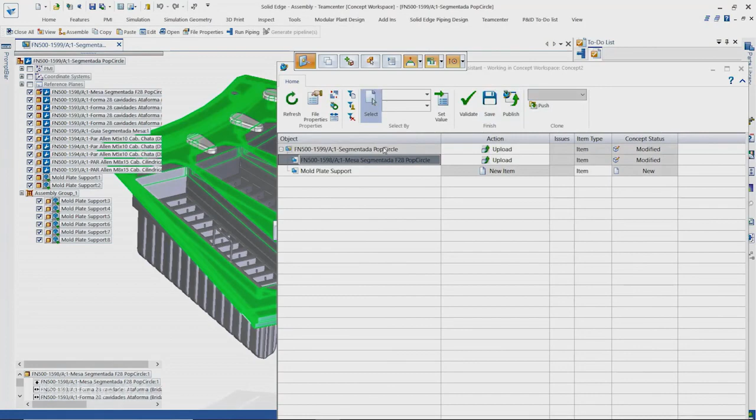The concept assistant helps with this process and provides options to filter for new or modified components or even revert any changes made. The 3D compare tool allows a quick visual check on the changes between the concept and the server versions, and the user has full control over the actions for any modified components. Once everything is defined, the data from the desired concept is seamlessly sent back to Teamcenter.

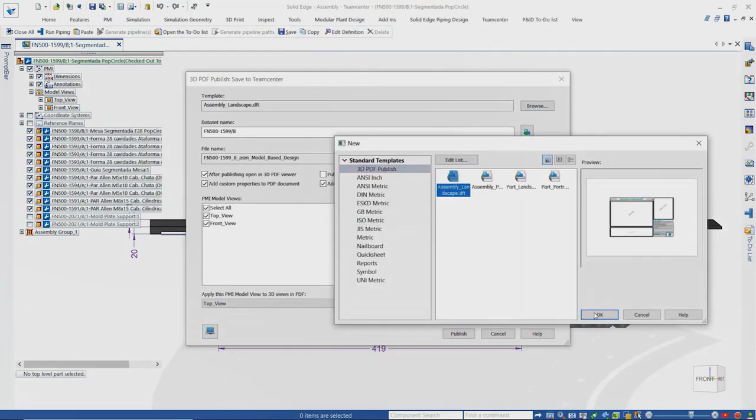Also new for Solid Edge 2021 is integration of Solid Edge's model-based definition content. Now all the downstream manufacturing information, including the MBD PDF output, is automatically captured by Teamcenter and visible within the item revision of the part or assembly.

Moving over to Solid Edge's built-in data management, a new Open As command allows users to control exactly how a file is opened from either Windows Explorer or from the most recently used menu. This allows full control over how an assembly is opened, such as defining the correct configuration, setting read-only status, applying large assembly options, and much more.

A new shape search capability allows designers to more effectively reuse existing models and prevent recreating designs from scratch. You can simply use an existing part or even model a basic representation as the basis of shape search. Solid Edge then scans the available database for similar looking parts, and filters are available to approximate the match criteria.

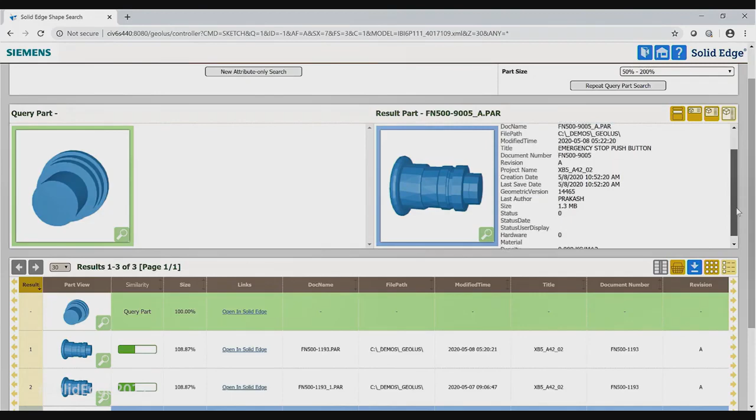Shape search results are compared with the original part, and the accuracy of the size is displayed as a percentage value. Once a desired part is found, a single click opens it into Solid Edge and makes it ready for use in our design. Back to you, Dan.

All right, thanks all. So a lot of stuff to see there in data management. First up, Shape Search - a new product that allows you to reuse data you already have. There's nothing more inefficient than recreating something you have, but if you've got 100,000 parts or a million parts, how are you going to know? Well, the way you're going to know is through Shape Search, now available to everyone.

We've also enhanced Pack and Go, which is a very popular Solid Edge feature, allowing it to trace the links even outside the current context. And the Open As command is super handy. It may not be obvious what you use that for, but for example, if you want to open an assembly with a certain configuration, you can do that easily from File Manager and open it to that configuration. Good stuff for your everyday use.

On the side of Teamcenter, the Concept Modeler is really a great new technology. Being able to make changes and try out what-ifs without committing a part number, for example, and deciding whether it's a brand new part or a revision to an existing part.

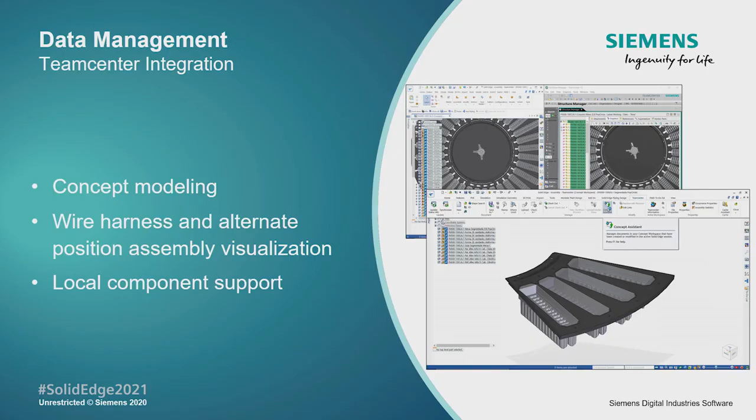Wire harness and alternate position assemblies are now visualized in the Teamcenter portal. And of course, the local component support - we added local component support in Solid Edge, fully integrated into Teamcenter as well.

Next up is cloud-based collaboration. More and more we see our customers around the world having to collaborate across their business in different locations, collaborate with customers or suppliers. And the cloud really enables this. Some great new capabilities for cloud-based collaboration. Let's take a look.

Being cloud-based, browser-based, means you can use this on any device, be it your phone, tablet or PC, and it also works with any common CAD file types. It's not just Solid Edge, it could be NX or other common file formats you might work with in your company. Being browser-based means it's instant on, and we improve that productivity with user-assisted guidance that holds your hand each step of the way in using any of the capability in this app.

So here we're setting up a new project. It's guiding us to upload files into this project and into our cloud storage. We can do this in two ways, either directly into the browser, or through desktop synchronization, which I'll show later. This data could be PowerPoints, Words, or PDFs.

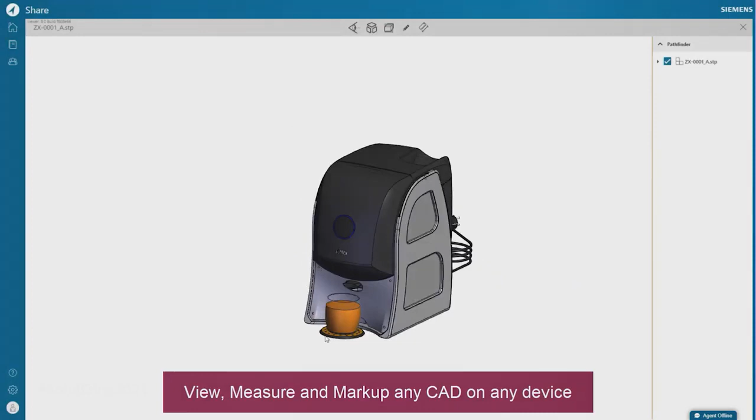For CAD files, here we've got an integrated 3D view environment. We can hide and show components with the tree on the right-hand side. And there's other great tools here, such as Automatic Explode, so we can understand the assembly makeup, great for design and manufacturing reviews. No pre-setup explode needs to be handled there.

Also, it's got great tools such as the section views or cutaway tools. And if we want to take measurements on the fly, that's another tool here. Notice just how easy the interface is. It's what I call non-technical, so it's not just for design engineers' use. It could, for example, be used in a sales situation, nice and easy to get to any of the product features.

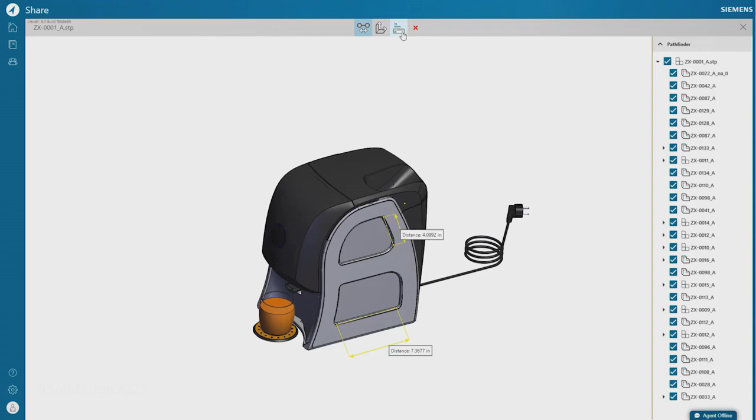So here we're taking measurements on the fly. We can also change the units on the fly too. And in this interface, we can also add markups or commentary. There's some tools to do some redlining. We can choose pre-selected shapes or just do some freehand sketching over the top of the 3D model, and we can also include text annotations as well.

Any of these markups get recorded in the tree, and what's great about that is you can start to have a conversation back and forth on any of the issues you're tracking, or maybe it's positive sales points about the product you want to call out. It also records who made that markup and when it was made.

So I talked about this other option of getting data into your cloud storage. We looked at upload into the browser. Also available is desktop synchronization. So this multi-CAD project we've got here, on our desktop, is represented simply as a folder. Any data we bring into this multi-CAD folder, either we drag and drop in, or we just save in, for example, from Solid Edge. This will get synchronized in the background as you work into this app.

Importantly, another great capability in this app is sharing with whoever you like, and it's nice and easy. Just simply type in the email address of the person you want to share with. You can choose the access permission or access level you want to grant. For example, here we could just choose view or view and download. You can protect your intellectual property here.

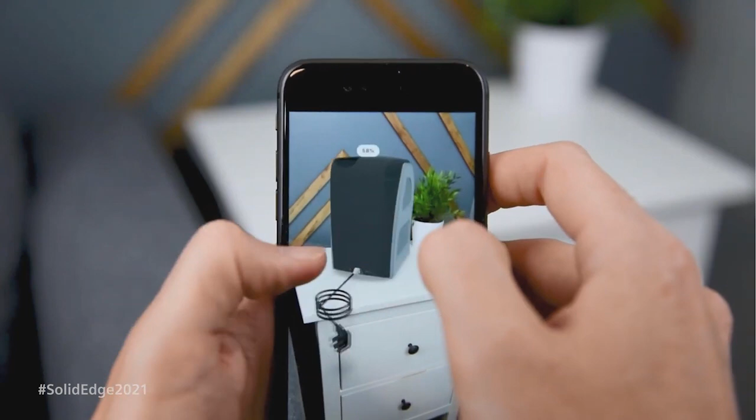Back to you, Dan. All right, some great new stuff there, cloud-based collaboration. Again, your organization has expanded, you have people in different locations, you have customers, suppliers, pulling that all together through this new cloud-based collaboration app.

It allows you to synchronize the files automatically because you can just drag and drop it on your desktop, it'll automatically be uploaded. You can do the view and markup, as you saw, you can communicate with your customers or suppliers. And of course it's all secure. You can share with who you want to share with, but also keep your intellectual property very safe. And finally, augmented reality. You saw that ability to mix the physical world and the digital world, a digital twin mix, if you will. Very powerful.

Customers are already trying this out in early access. PJ had the following to say about it: he's really got a distributed design and manufacturing organization, and his ability to use the new cloud collaboration tools allows them to communicate and collaborate across the globe quickly and easily. I think you'll find the same.

So I invite you to start your digital transformation journey. You've seen a lot of features in Solid Edge 2021 - there's mechanical design, electrical design, tech pubs, data management, a full suite of tools. I encourage you to start your digital transformation journey today, or if you've already started, take that next step. Integrate manufacturing, integrate electrical. The sky is really the limit.